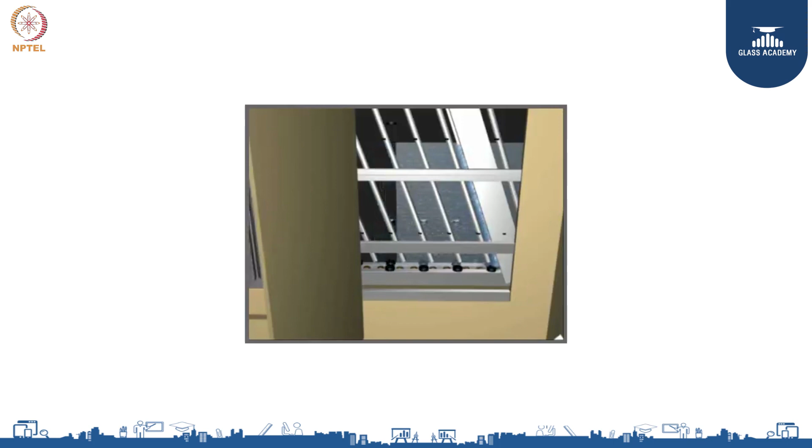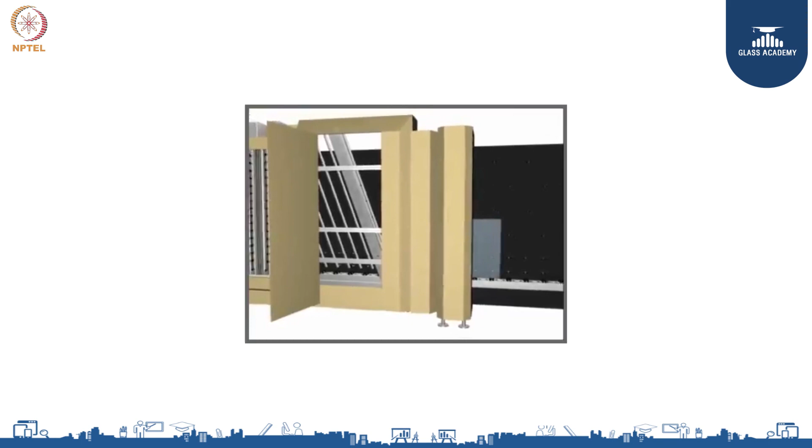Coming back to this, you have a washing unit, you have a drying unit, you have a spacer conveyor, you have a butyl extruder, you have a pressing unit which is normally vertical.

Now let us come back to washing. It is almost the last process in glass processing. You need to have a very clean surface before you make the IGU, so glass washing plays a major role in it.

You will have cutting oil residue, small particles of glass which will be stuck on the glass surface. That has to be removed, which is done by washing. Any finger marks from the operator also have to be removed, which is done by a good washing machine.

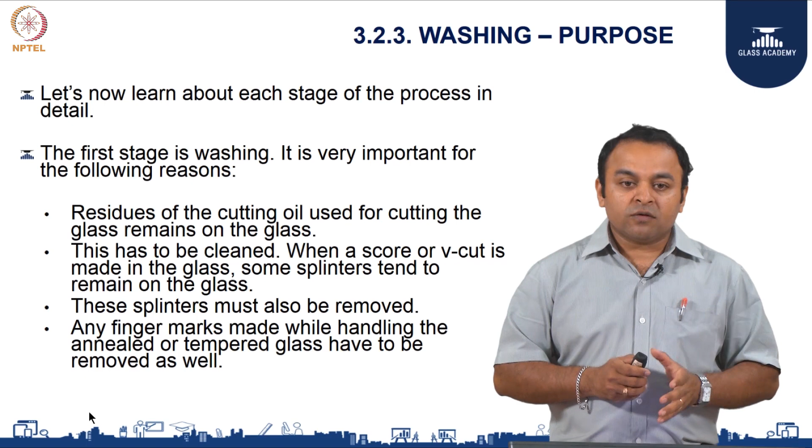The glasses now move through the vertical washing machine, which has got 2 chambers with warm water as well as normal room temperature water. Normally it has got 3 to 4 cylindrical bristles which touch the glass surface and clean it.

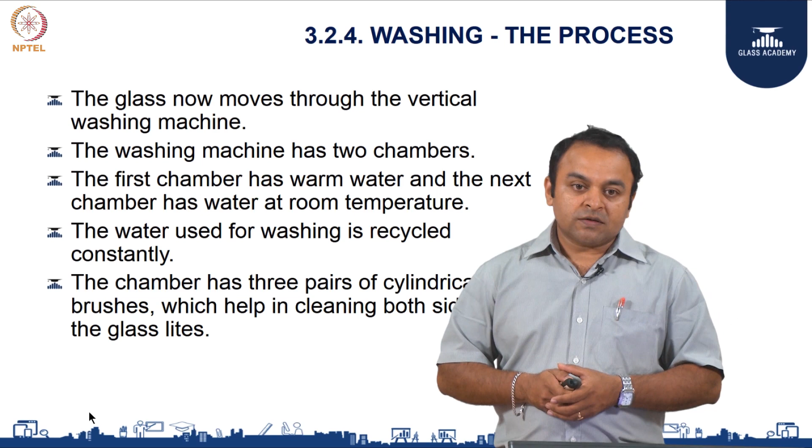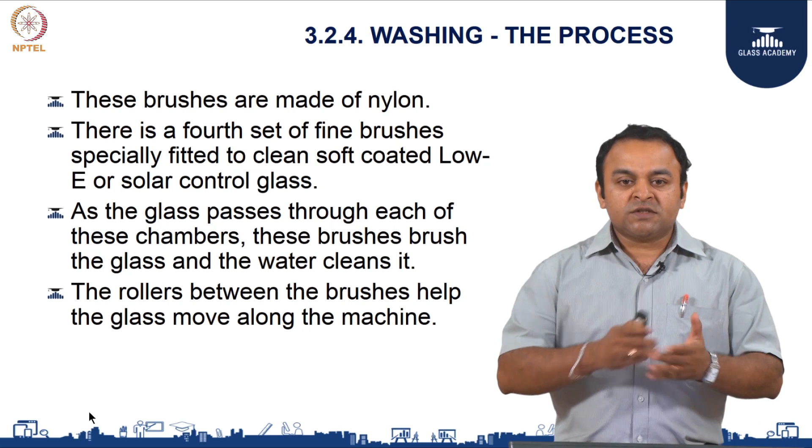Normally the brushes are made of nylon. You also have polyamide which is used for high end washing, and for low-E or soft coated glass, you have a 4th pair of bristles which is used to clean the surface of glass.

It is very important that the washing machine should not have a greasy internal surface. To ensure that, change the water in the first tank every day, change the water in the final tank every week, and clean the entire machine with water once a month. These are very good practices to be followed.

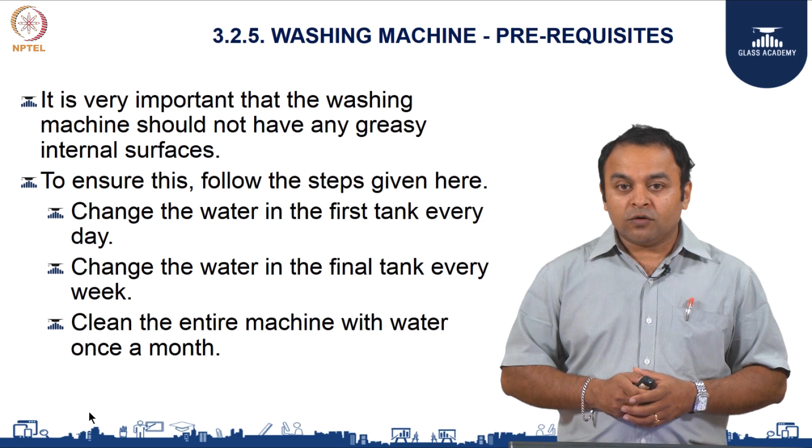This process takes approximately 3 hours. The machine also needs to be cleaned with hydrogen peroxide or RBS 50 once every 6 months.

Now comes the measurement of water washing quality. We often feel, are we washing it properly? Does the glass come out washed right or not? So how do you determine the washing quality?

What you do is take a drop of demineralized water, place it on a clean washed surface, and then see the angle of the drop. If the angle of the drop is almost 90 degrees, the glass is said to be very dirty.

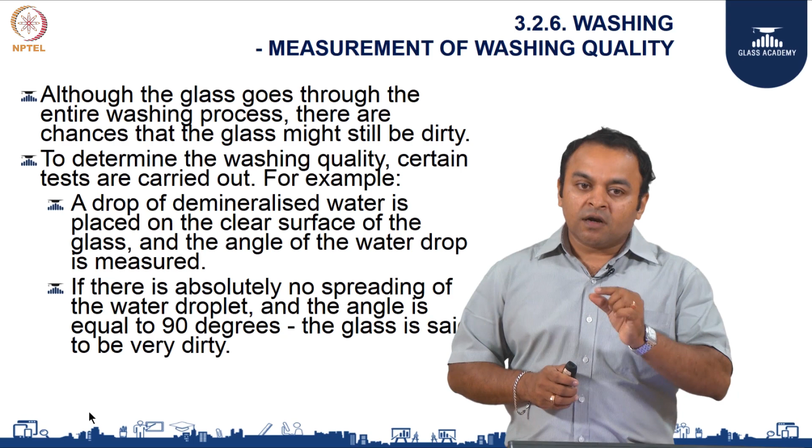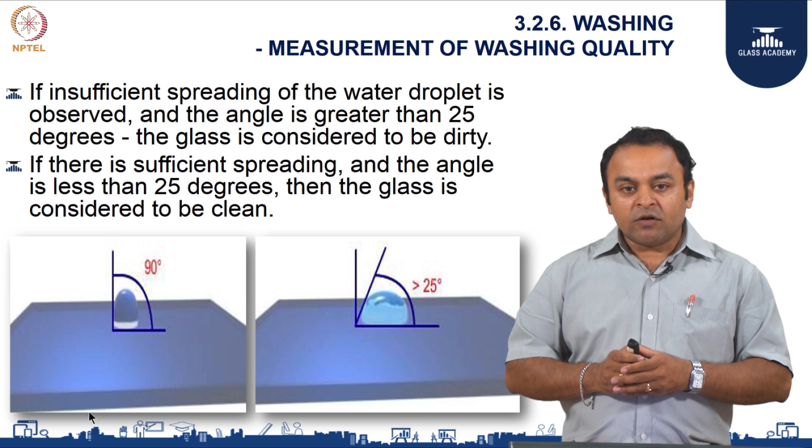You can see in the image, when the angle is almost 90, the glass surface is really dirty. If the angle is greater than 25 degrees, the glass is considered still dirty, and if the angle is less than 25, the surface of the glass is said to be clean.

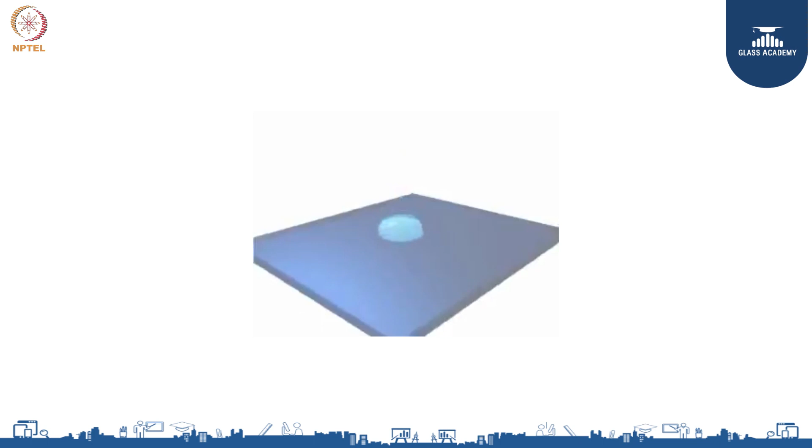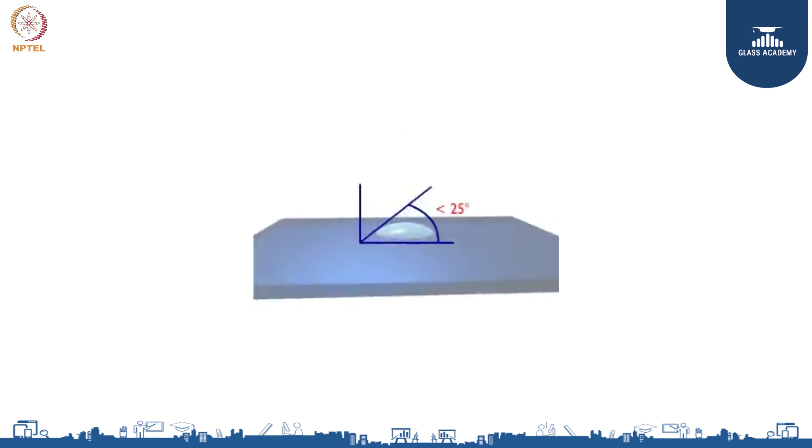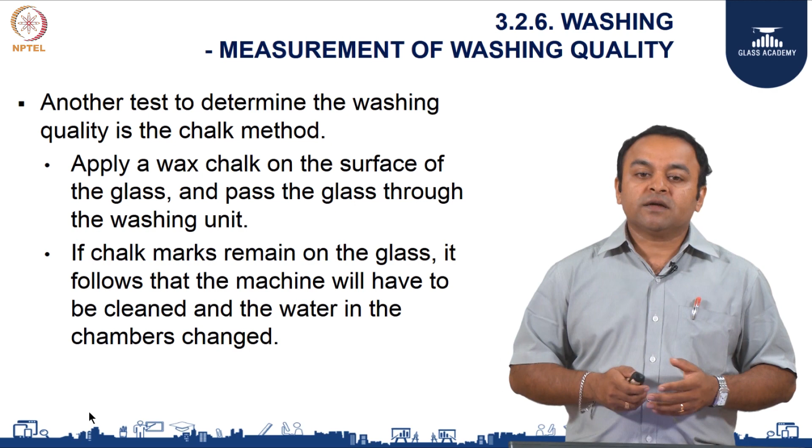Another test which can be used is the chalk method. Apply wax chalk on the surface of the glass and pass it through the washing unit. If the chalk marks remain on the glass, it follows that the machine will have to be cleaned and the water changed.

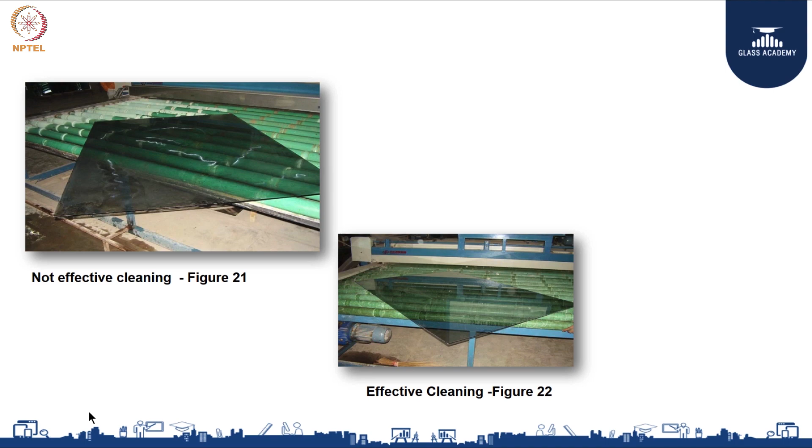You can see the image on the left hand side, the chalk marks still left on the glass surface. On the right, you can see it is a very clean surface.

Now comes the drying and inspection area. Once the glass is washed, it moves onto the drying unit. You have knives in the drying unit, and air is blown over the glass with great pressure.

There are air knives on the unit that help to dry the glass. These air knives should be installed at an angle in order to clean the water in the opposite direction of glass movement. The glass then moves on to the inspection area where it is checked, with light from behind making it easier for inspection.

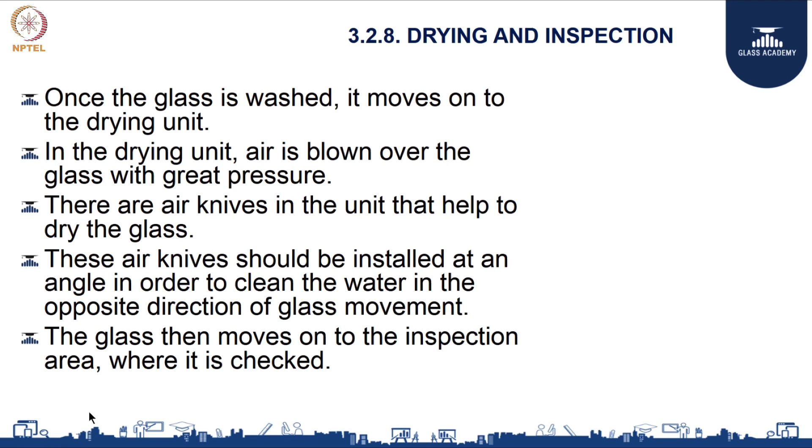Now comes the frame manufacturing. The frame is nothing but an aluminum spacer which is bent. You can have either a corner key or a bent spacer which can be used. The spacer material is cut to the specific size.

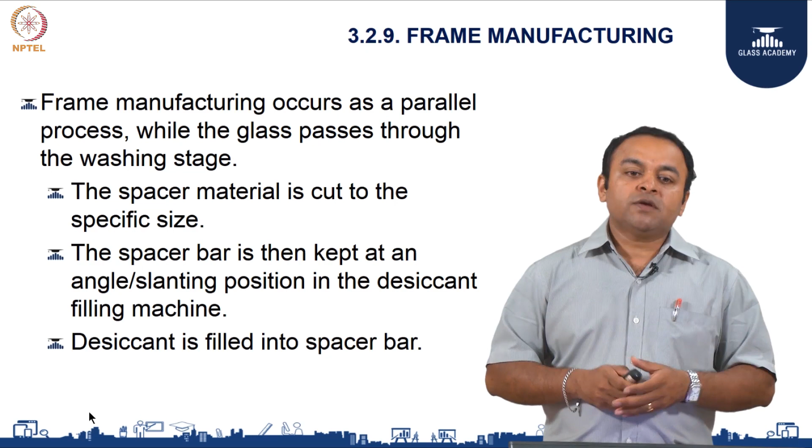The spacer bar is then kept at an angle, slanting position, to fill the desiccant. You can also have an automated machine where you fill the desiccant inside, and that drilled hole is sealed with a primary sealant.

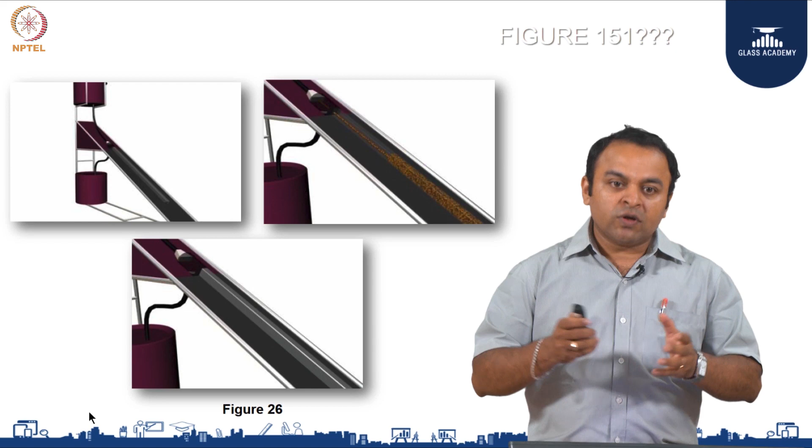We can see the aluminum spacer which is cut based on the dimensions required, and you have either semi-manual filling of desiccant or an automated way of filling the desiccant. You should have at least ideally 85% of the spacer bar filled to give a life of at least 5 to 10 years of the DGU.

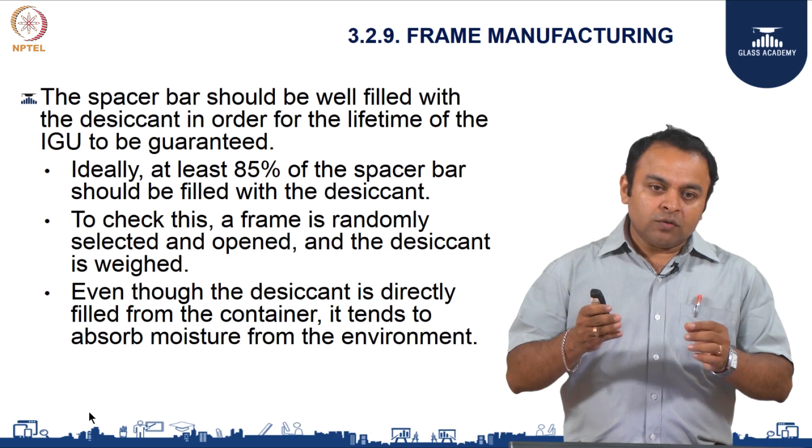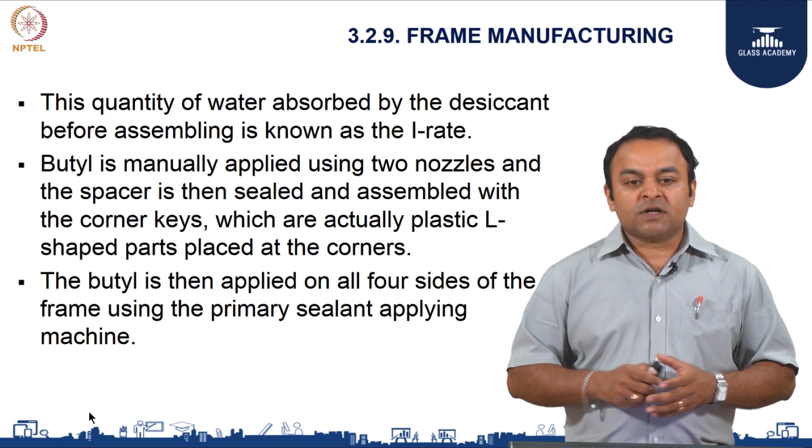Even though the desiccant is directly filled from the container, it tends to absorb moisture from the environment. So the time between filling the desiccant and assembly to the unit has to be minimal. The quantity of water absorbed by the desiccant before assembly is known as the I rate. The butyl is then applied on all 4 sides of the frame using the primary sealant applying machine.

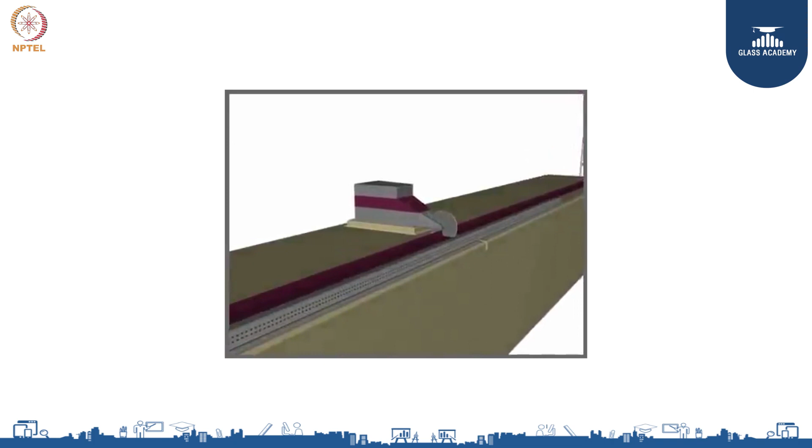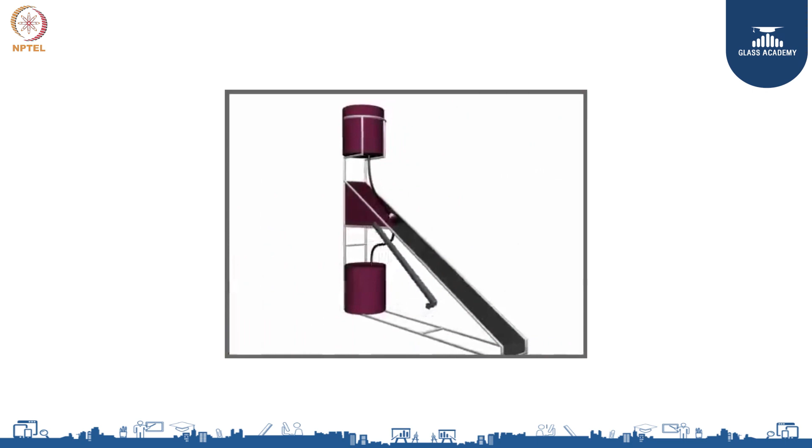Take care that proper gloves are worn by the operator, because otherwise the adhesion will be affected.

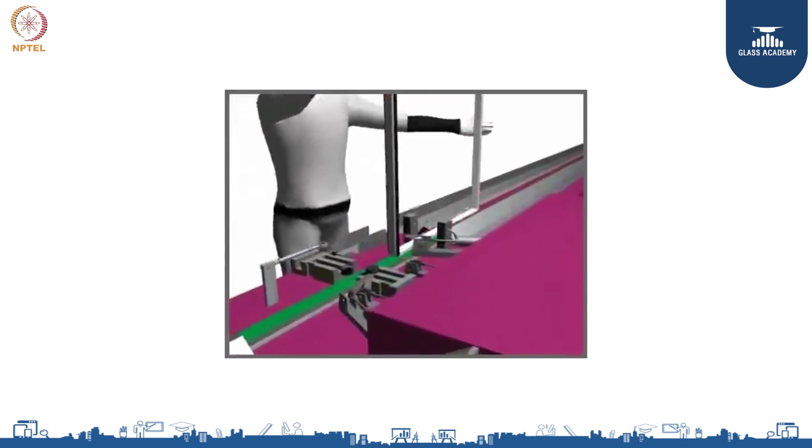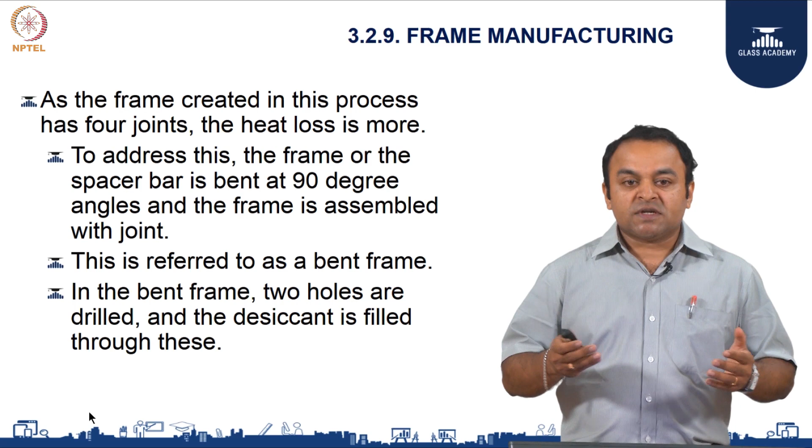As the frame created in this process has 4 joints, the heat loss is considered to be more. To address this, the frame or the spacer is bent at 90 degrees and the frame is assembled with a joint, called a bent frame. It is then sealed with butyl.

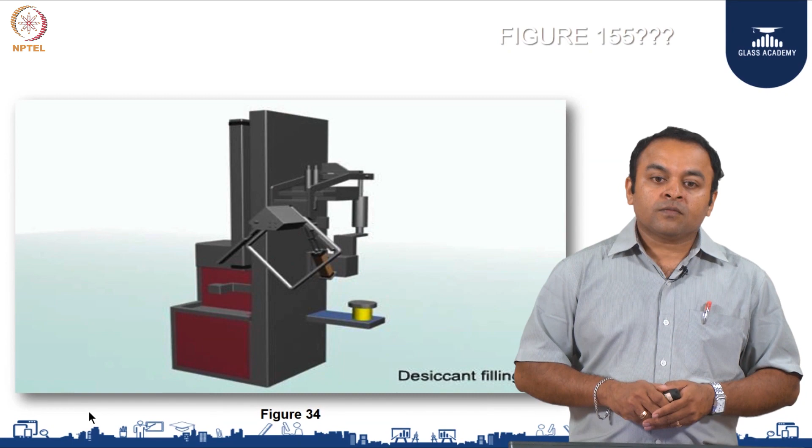The assembled frames are kept stacked on the spacer conveyor. Ideally, pressing should be done within 1.5 hours from filling, but it can go up to 3 hours. It is always ideal to hang the filled aluminum spacer with desiccant like a frame as shown in the picture. This is an automated desiccant filling machine.

Butyl temperature settings must always be less than the maximum temperature recommended by the supplier. Handling should be minimal to improve the adhesion of the spacer. Use only the fingertips when necessary and touch only the frame, not the butyl ribbon.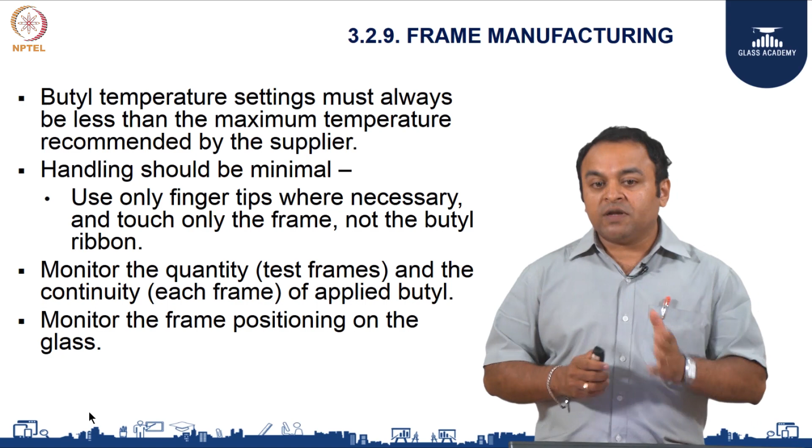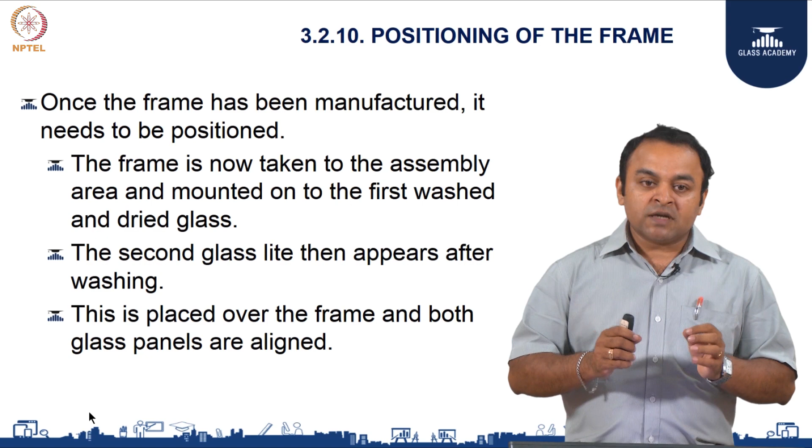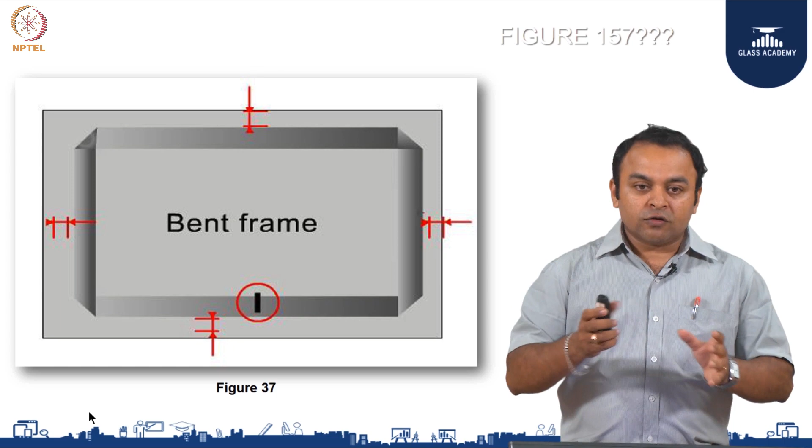Monitor the quantity and continuity of applied butyl, that is very important. Monitor the frame positioning on the glass. Once the frame has been manufactured, it needs to be positioned. This is the only manual process in this IGU, and it has to be done very skillfully. The picture shows the skill applied so that the bite is uniform on all 4 sides. After the frame has been positioned, the glass goes through the next stage of pressing and gas filling.

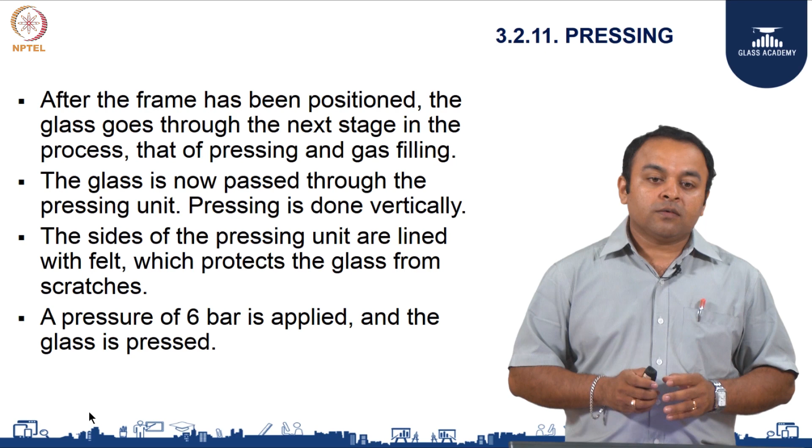The glass is now passed through the pressing unit. Pressing is always done vertically. The sides of the pressing unit are lined with felt which protects the glass from scratches. A pressure of 6 bar minimum is applied to have better adhesion of the 2 glasses.

The inert gas can be filled from the machine, or you can also have a semi-manual machine as shown in the picture. Based on the volume of the DGU, you can fill the inert gas in it, either argon or krypton.

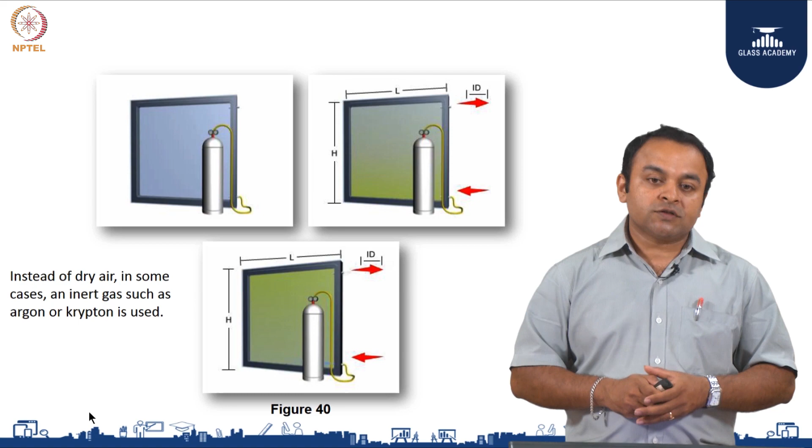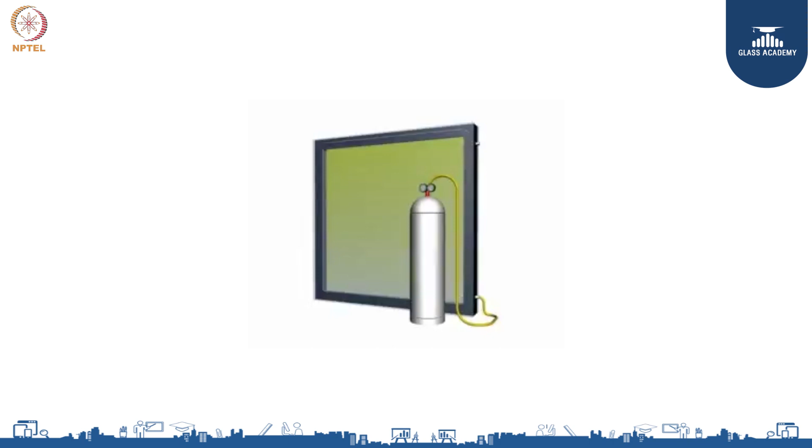The last stage in the process is sealant extrusion. The secondary sealant, mostly silicone which is used in our country, is applied on all 4 sides. This provides mechanical cohesion to the whole assembly.

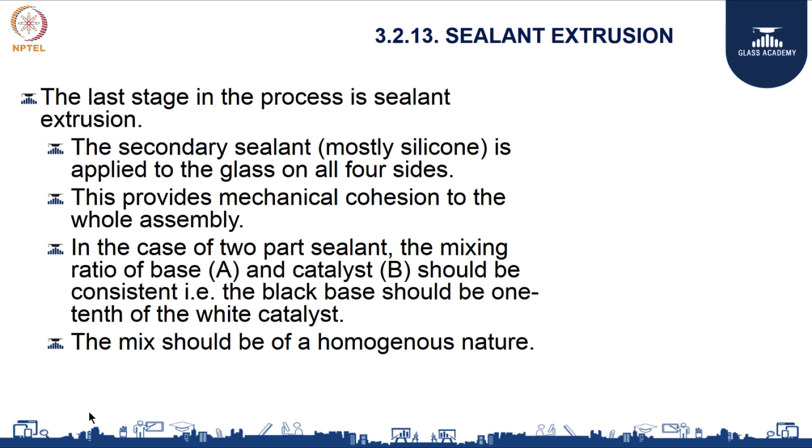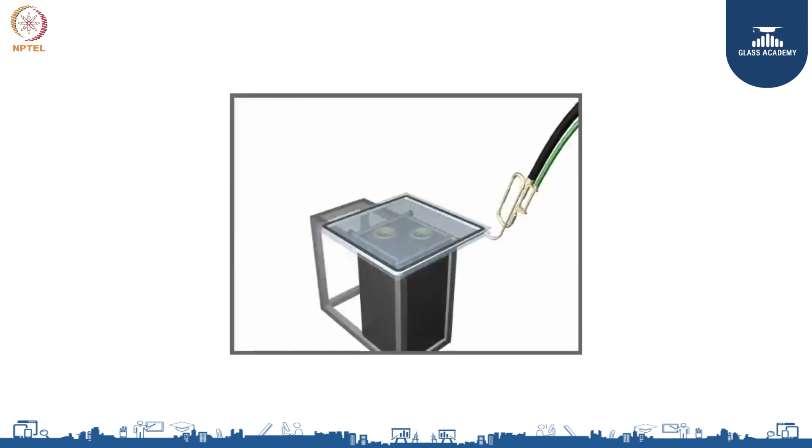In case of 2-part sealant, the mixing ratio of base A and catalyst B should be consistent. Normally it is mixed in a 1:10 ratio, and this has to be a homogeneous mixture. You can either have it manual, like the way it is shown in the picture, or you can have robo sealing, which is most ideal.

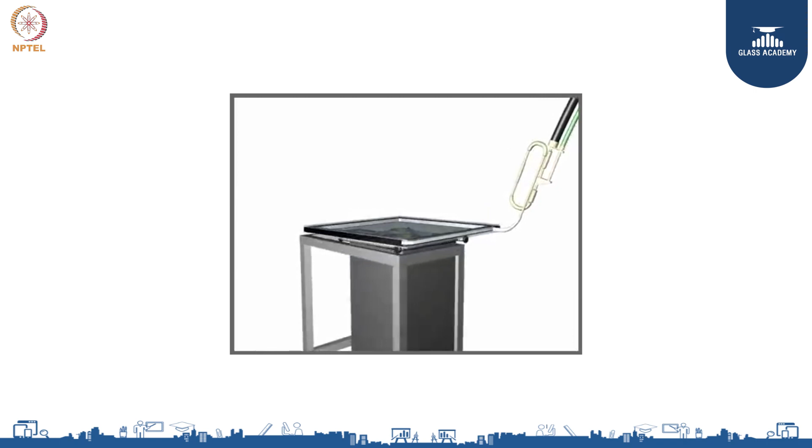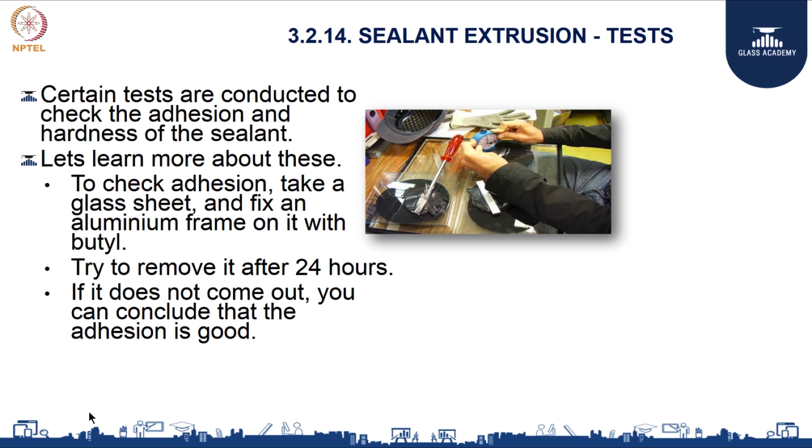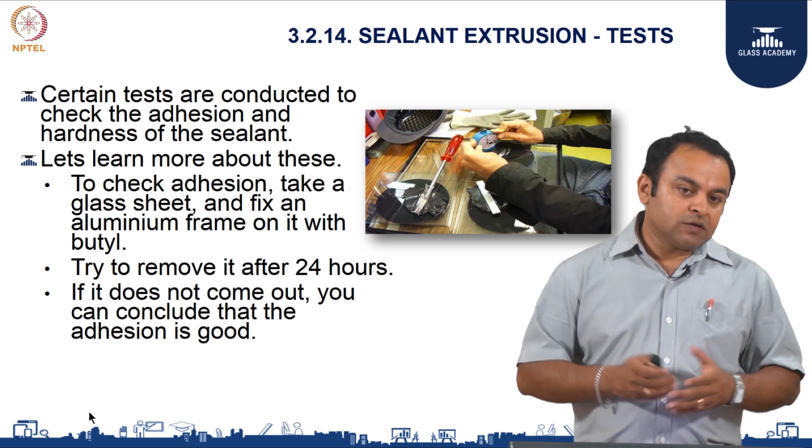Now let us come back to the tests performed on double glaze units. The first test is the adhesion test. Take a glass sheet and fix an aluminum frame on it with the butyl. Try to remove it after 24 hours. If it does not come off, the adhesion is said to be really good.

The second test can be a butterfly test, which is most commonly done in our country. Put some silicone on a sheet of paper, fold it and then press it. Check the color of the mix, which indicates whether it has been mixed properly or not.

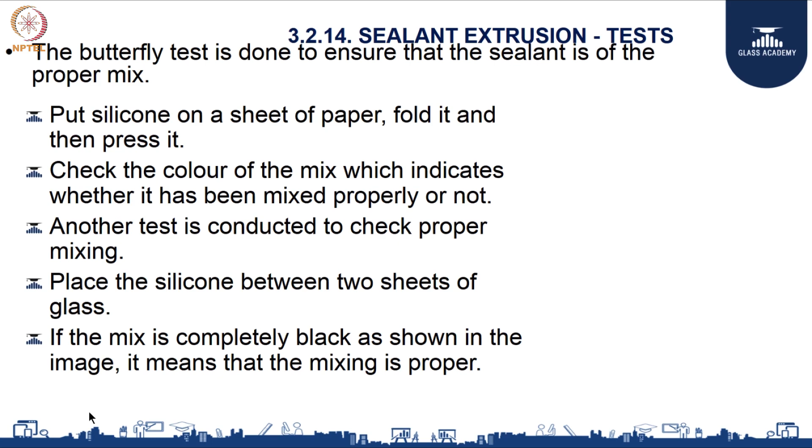The same thing can be performed by having two glass sheets and putting the silicone in between. If the mix is completely black as shown in the image, it means the mixing is proper. In this image you can see the mixing is not proper because you can see some white streaks, while in this image it shows the mixing is really good.

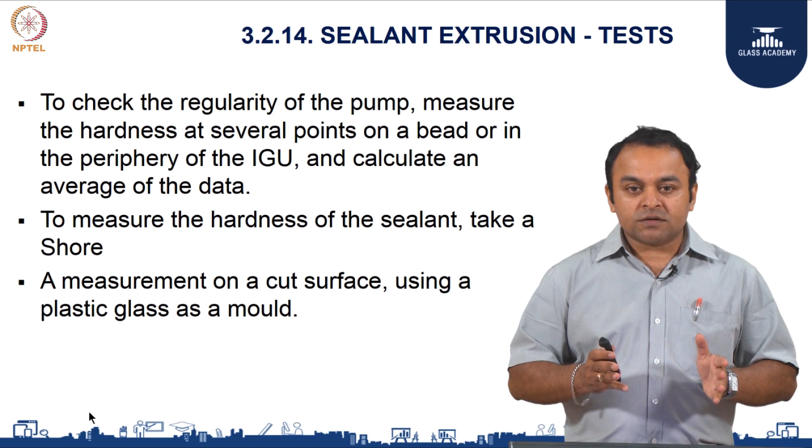Next, to check the regularity of the pump, measure the hardness at several points on a bead or in the periphery of the IGU and calculate an average of the data. You can have a Shore A hardness test, which is done on the secondary sealant after it cures for 24 hours. This is a Shore A hardness tester.

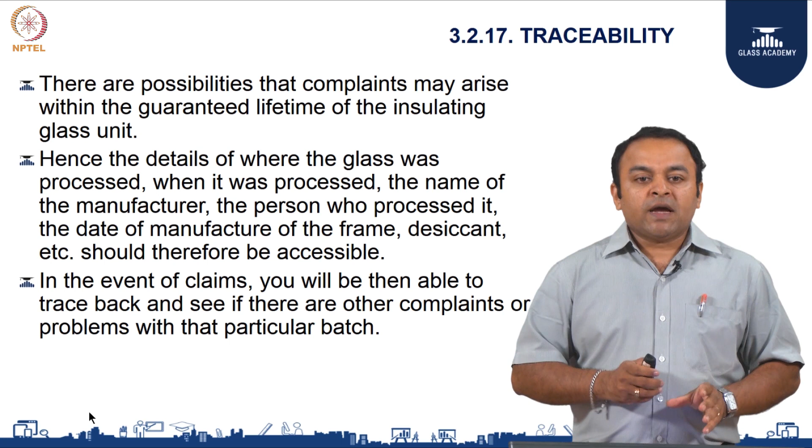One important thing is traceability. We always need to have some traceability of the consumables used while making the IGU. So please maintain a logbook which will have all the records of the spacer used and the consumables used for making the IGU.

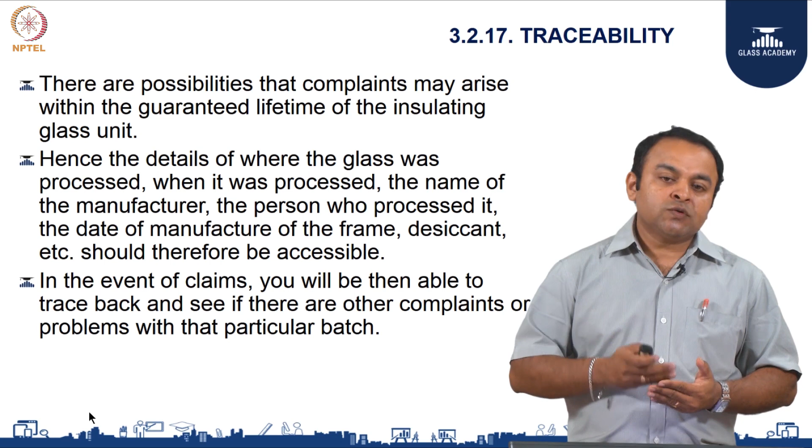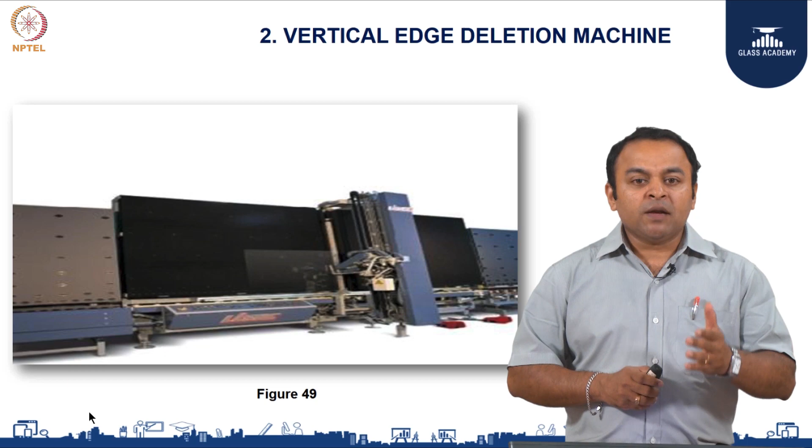For low E glass, you have something called edge deletion, which you might have heard of. This can be done either in the IGU machine or in the cutting machine.